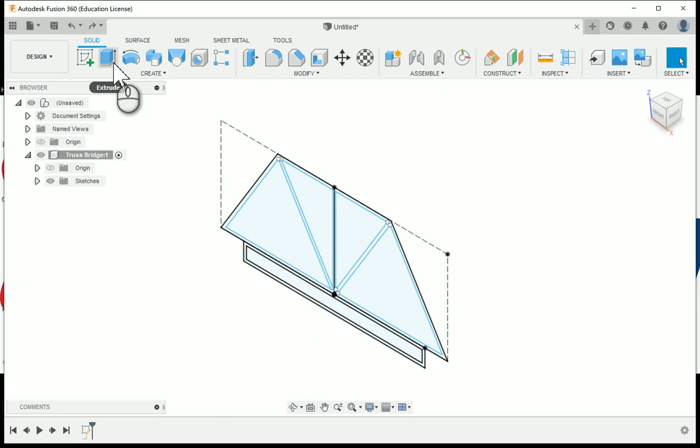This is the third video in the Project 218 Truss Design video series. In the last video, we looked at creating sketches to come up with an example bridge design, so some useful sketch tools that might be beneficial for you to know. In this video, I'm going to use that sketch, and I'm going to create, using the extrude tool, our bridge design.

So I'm going to grab all the areas of the sketch that I want to extrude to create our bridge design. And then I'm going to extrude that out to a depth of 3 inches, because that's the maximum size that we have for our bridge.

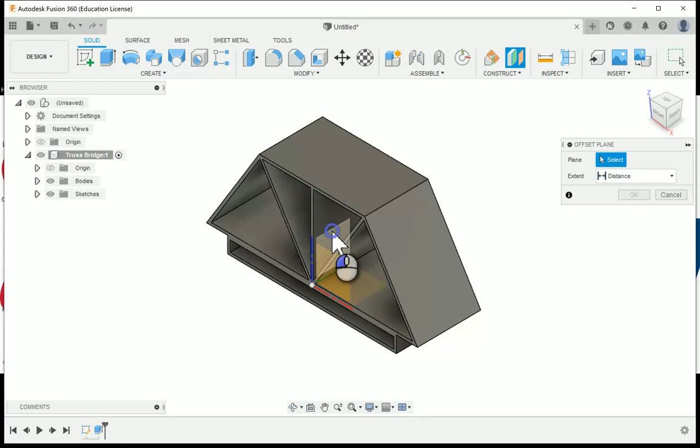To make this look a little bit closer to what our final product should be, I'm going to create an offset plane, and I'm going to choose the right work plane here, drag it out so that it's outside of the bridge. I'm going to create a new sketch on that work plane, and I'm going to create a 2-point rectangle on the inside of the bridge here.

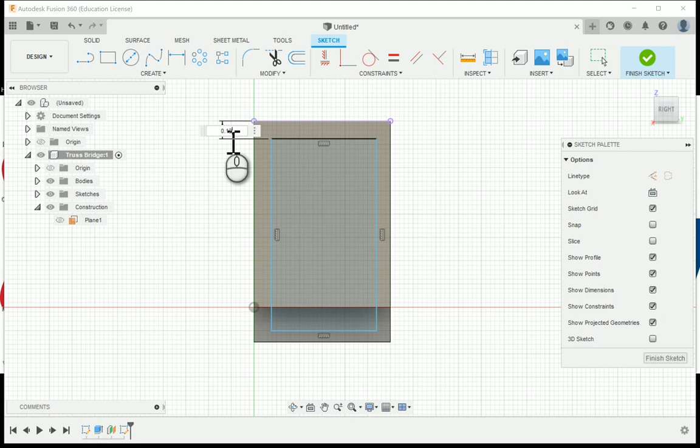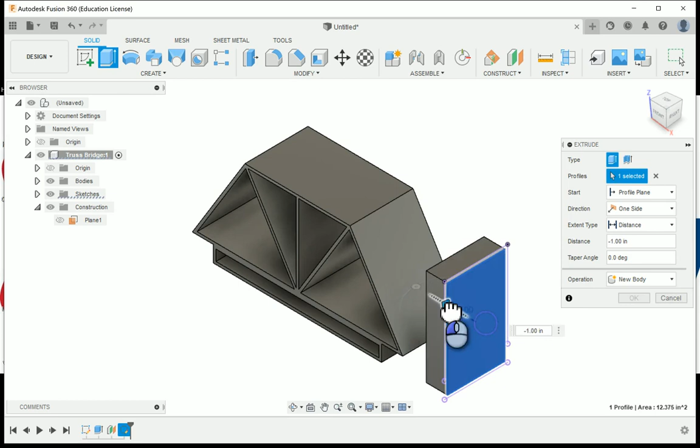And I'm going to offset, using the dimension tool, each edge by a distance of 0.125. So I'm just going to continue that process around all 4 edges until I finish it, and then I can finish the sketch. I will extrude, grab the rectangle until it cuts into the bridge, until it goes all the way through to the other side, and I can say OK.

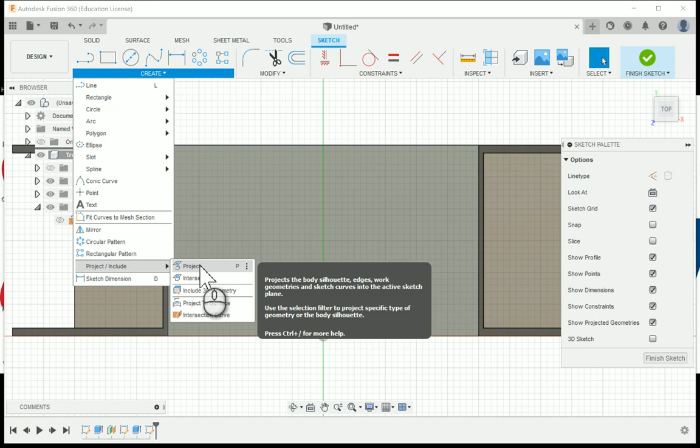So that gets most of our bridge taken care of, and now I can take a look at doing some of the other cut throughs. So I'm going to hit create sketch. I'm going to click the top face. I'm going to follow a very similar process, although on this one I'm going to go to create, project / include, choose project, and I'm just going to click inside of just the top face, and I'll say OK. I can use the offset command and then offset those lines in by a negative 0.125.

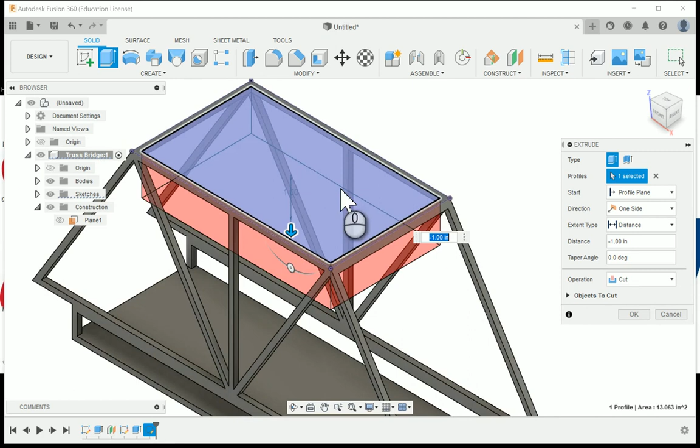Then I can finish the sketch, extrude that down. I'm not going to go all the way through to the bottom, but I will just extrude it down to cut through enough and say OK. So that gives us the top portion of the bridge. And then I can turn to the bottom. I'll follow the same kind of process.

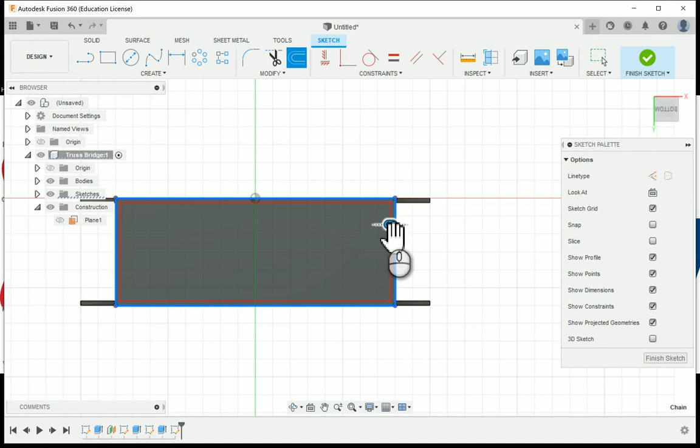Click the bottom. I can press the P key as a shortcut to run the project command. Click inside there and say OK. Offset, and then bring this in. And finish the sketch. When ready, I can hit extrude, and then same kind of thing, I can drag this up just a small amount, just so that it cuts through.

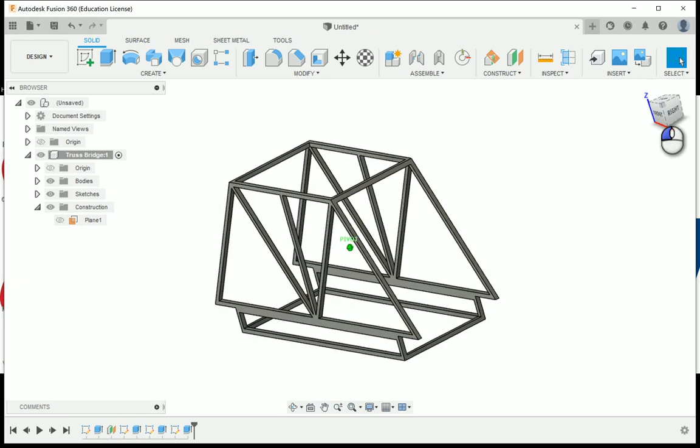Say OK, and here we've got all of our truss members now being shown. These are all 1/8 inch truss members. All of our edges line up and everything, and this is what our final truss bridge would somewhat look like.

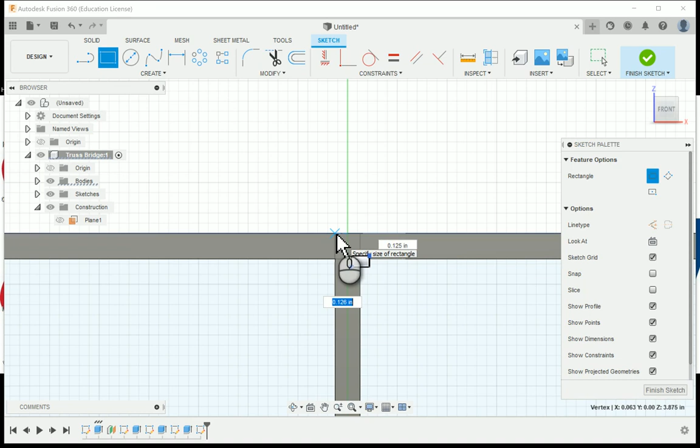Now, if I want to, I can add some crossbars, especially here at the top. If we desire to do that, I can hit create sketch. I could always click here on the inside face. I could draw utilizing some of the other geometry. So this is going to be 0.125 by 0.125. I can say finish sketch.

Extrude our shape. And usually what I like to do is just turn this model around and click till I hit the inside, and that would create a bar there at the top, if we desire. So those types of things can be done to create your truss bridge design.